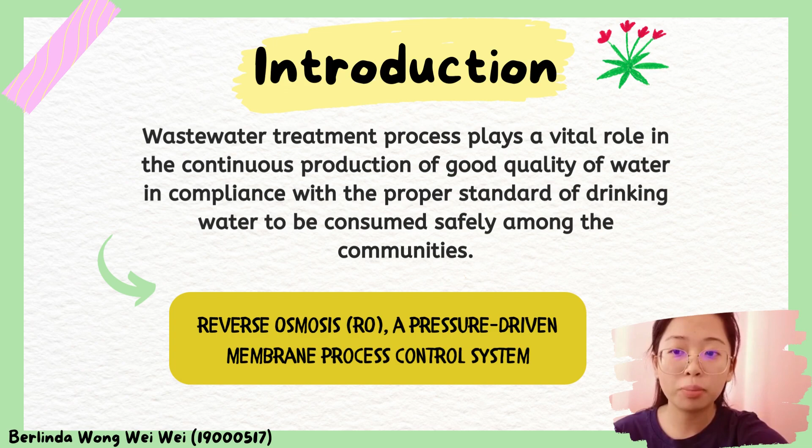One of the physical water treatment methods, reverse osmosis, is a pressure-driven membrane process control system discovered to be widely used for the treatment of municipal or industrial wastewater. Reverse osmosis process is normally used in several applications such as selective separation, purification of water, and concentration process in food and beverage industries. With the pressure applied, the reverse osmosis separates the dissolved solids from the water through a semi-permeable membrane via solution diffusion mechanism.

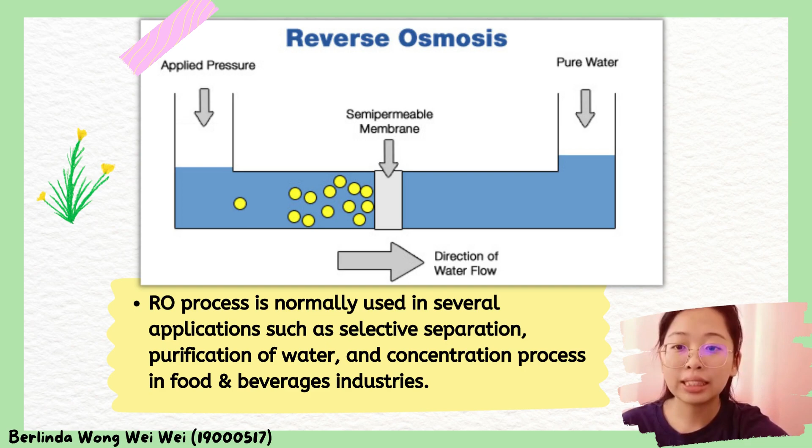As the reverse osmosis membrane is hydrophilic and semi-permeable, the water will be able to diffuse in and out of the polymer structural membrane, and mostly the suspended solid or large molecules are managed to be separated from the water stream.

Despite the potential and advantages of using a membrane-based water treatment process, there are still a lot more limitations or challenges to be considered. This includes the low permeation flux, less selectivity, less membrane durability, and membrane fouling.

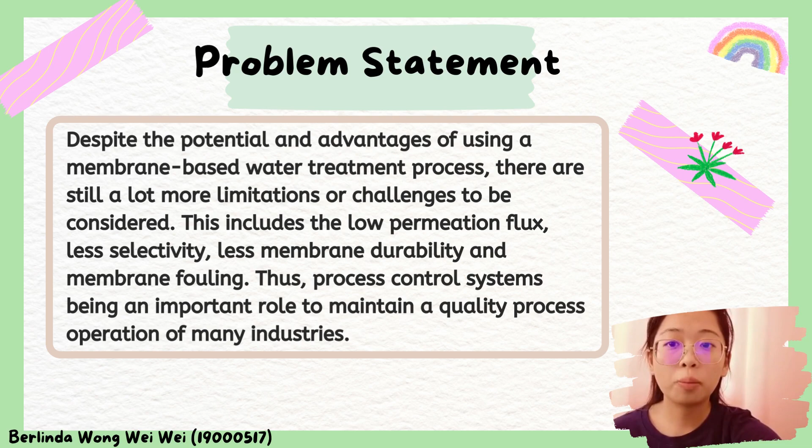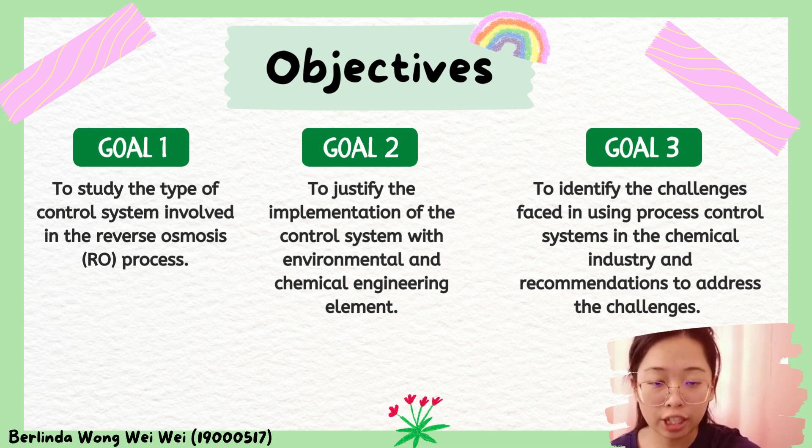Thus, process control system plays an important role to maintain a quality process operation of many industries. With the problem statement, we have the objectives of: first, to study the type of control system involved in the reverse osmosis process; second, to justify the implementation of the control system with environmental and chemical engineering elements; third, to identify the challenges faced in using process control system in the chemical industry and recommendations to address the challenge.

Hi, I'm Navinjeet Kaur, and today I'll be doing the methodology part. Reverse osmosis is one of the most popular separation techniques used mainly for the purification of water. Reverse osmosis, a pressure-driven membrane process, is one of the physical water treatment methods where it is discovered to be widely used for the treatment of municipal or industrial wastewater due to the involvement of low cost.

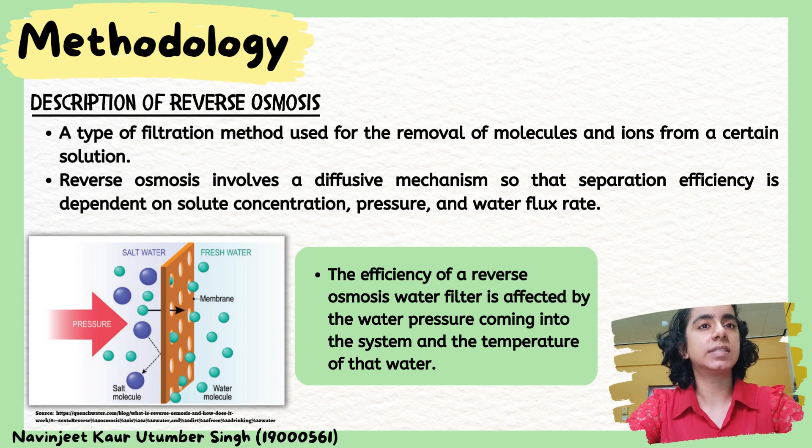It involves a diffusive mechanism so that separation efficiency is dependent on solute concentration, pressure, and water flux rate. The efficiency of a reverse osmosis water filter is affected by the water pressure coming into the system and the temperature of that water. Reverse osmosis involves 4 stages, where the first is sediment filter, followed by pre-carbon block, next reverse osmosis membrane, and lastly post-carbon filter.

The advanced membrane material, process design, and energy recovery have resulted in low-cost production of the semi-permeable membrane to be used in the reverse osmosis process.

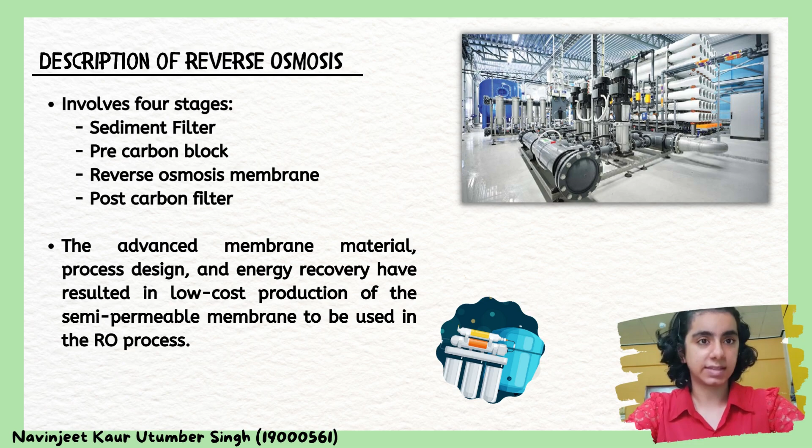The figures in the slide show the process flow diagram of a reverse osmosis control system. The unprocessed water is pushed through a wire strainer in the unit to get rid of any big particulates. After that, the water flows through a cartridge filtering stage with a 5 to 20 micron filter. To remove any residual hydrocarbons that have been dissolved or emulsified, the water is traveled through an organoclay adsorbent vessel at a pace that allows for a 5-minute or longer residence period to accomplish the requisite oil removal.

Microfiltration or ultrafiltration as an intermediate pre-treatment step is considered. The de-oiled water is then sent via a high-pressure positive displacement pump to boost the pressure to 600 to 1200 psi, which is the working pressure for reverse osmosis. In the high-pressure tank, a PID controller is used to maintain pressure at a given point.

The reverse osmosis membrane separates the flow into concentrate and permeate streams. The concentrate is the largest stream, accounting for approximately 85% of the total flow of the operation, and it may be regenerated back to the feed water. The concentrate is regenerated until the salt concentration in the feed water exceeds an upper working limit, at which point the permeate or fresh water departs the process.

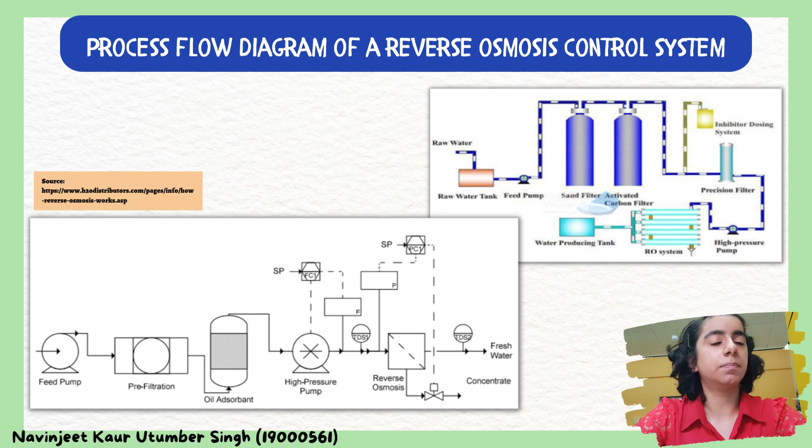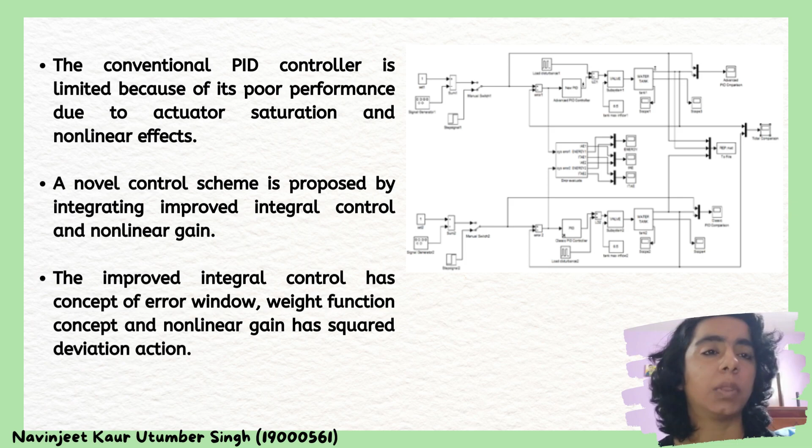The improved integral control has the concept of error window and weight function concept. Also, nonlinear gain has squared deviation action. The performance of the newly proposed PID technique is compared with those of conventional ones via simulation. Present the justification of the proposed process control system.

Now I'm going to present the type of controller. For PID controller, it continuously calculates the error value as a difference between a desired set point and a measurable process variable, and applies a correction based on the proportional, integral, and derivative terms. But for the conventional integral, the controller integral section is between 0 until present. But for the new type of integral controller, the integral section is between a specific past time and present time.

Robust control is a control design method that focuses on the reliability of the control algorithm. Robustness is usually defined as a minimum requirement a control system must satisfy in order to be successful in a practical environment.

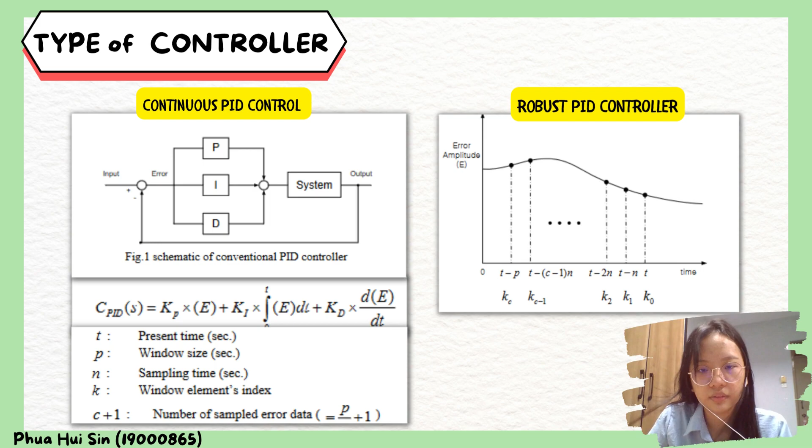Now I'm going to present the justification based on the simulation result. As you can see in the graph, the settling time of the robust PID controller is shorter compared to the conventional PID controller. The settling time is the time required for an output to reach and remain stable in a given error band, following some input stimulus. Therefore, the shorter the settling time, the easier and more efficient it is for the controller to set the outcome to a set point.

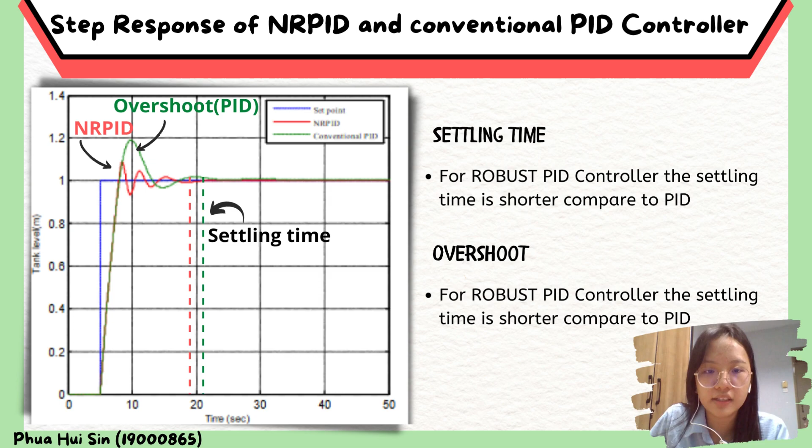For the overshoot, we can see that the robust PID controller has a lower overshoot value compared to the conventional PID. Overshoot value shows how much the system exceeds the targeted value, which is our set point. Therefore, the lower the overshoot, we're able to minimize the response times and make the system more efficient.

Now come to the integral of time multiplied by absolute error of robust PID versus conventional PID controller. According to the graph, initially the robust PID and conventional PID are at the same value, but conventional PID started to increase dramatically after 7 seconds. However, robust PID becomes a straight line. Therefore, we can say that the stabilizing time and peak time for robust PID is shorter than conventional PID controller.

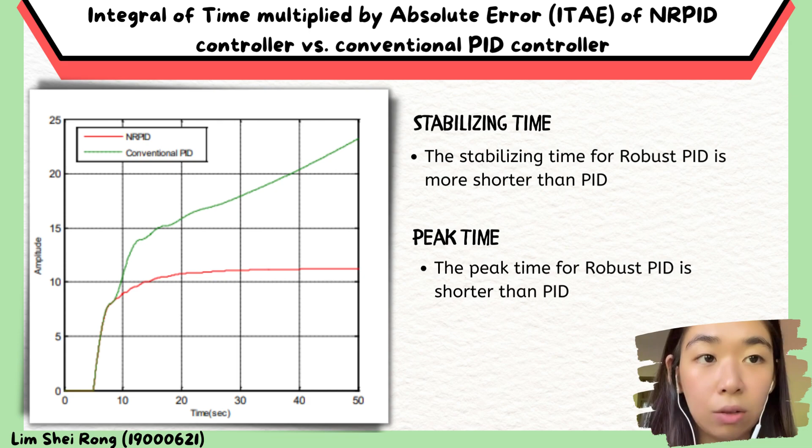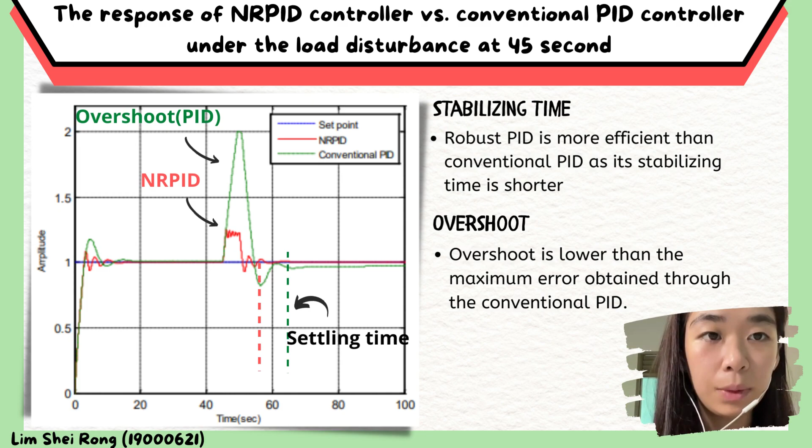Next is the response of robust PID controller versus the conventional PID controller under load disturbance. Based on the graph, we can clearly see that the stabilizing time is shorter for robust PID compared to the conventional PID controller. However, for the overshoot, the maximum error obtained through the conventional PID is higher compared to the robust PID.

Continuing with the integral of time multiplied by absolute error of robust PID versus conventional PID controller under load disturbance at 45 seconds, the graph shows that the stabilizing time for robust PID is shorter than conventional PID controller. The peak time for robust PID is also shorter than conventional PID.

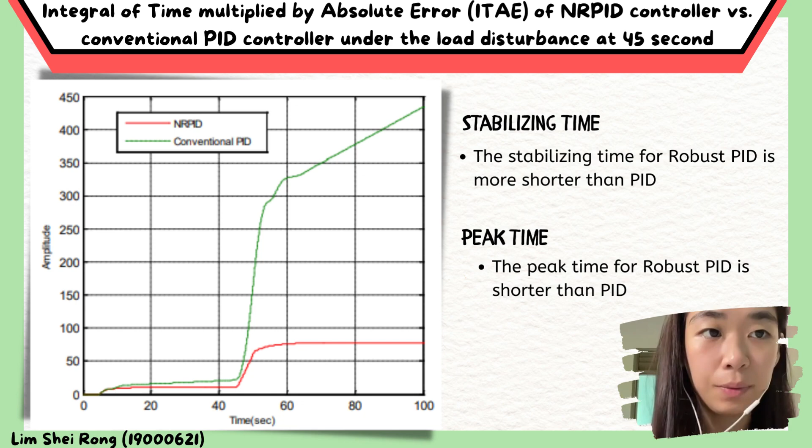As a result, robust PID controller is more suitable compared to conventional PID because the response error of robust PID decreases along with time and the error is not accumulated, which stabilizes the system. The response error of robust PID decreases drastically, which also makes the system more stable. The new concept of robust PID is successfully implemented and proved to be very effective compared to the conventional PID.

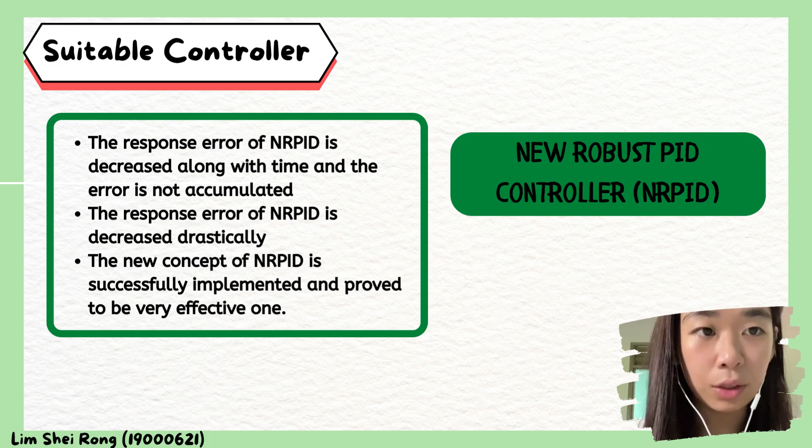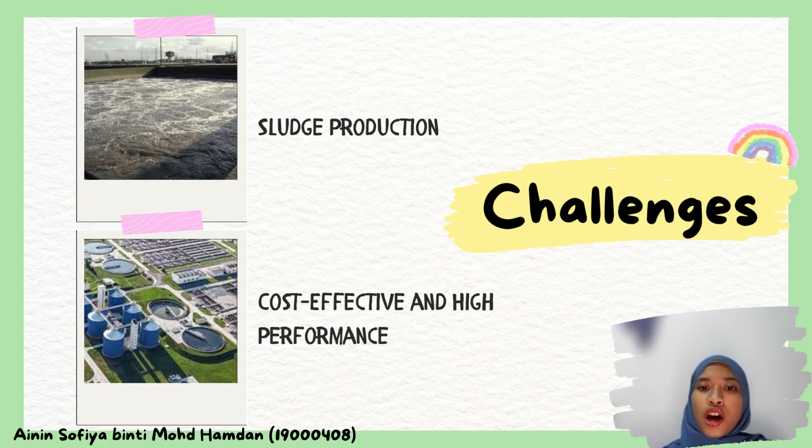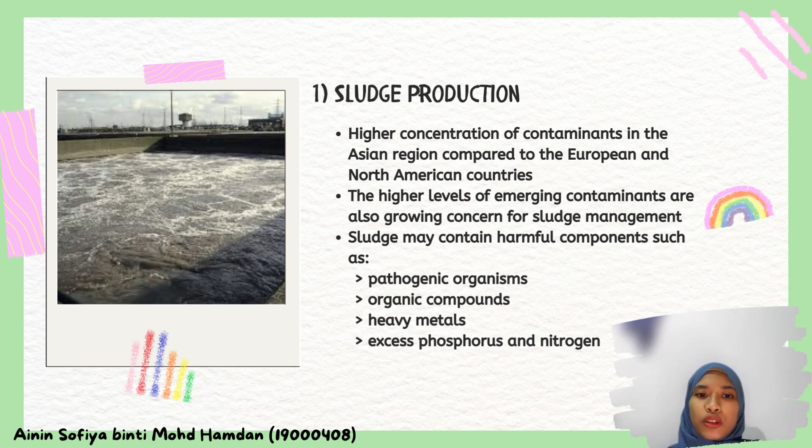The challenges in treating wastewater are varied and depend not only on laws governing effluent control but also on regional characteristics and socio-economic conditions. The major challenge in wastewater treatment plant is sludge production. The Asian region contains higher contaminants in raw wastewater compared to European and North American countries, according to study reports. The higher levels of emerging contaminants are also a growing concern for sludge management, because sludge may contain harmful components such as pathogenic organisms, organic compounds, heavy metals, and excess phosphorus and nitrogen, which may lead to disease and health risks to humans.

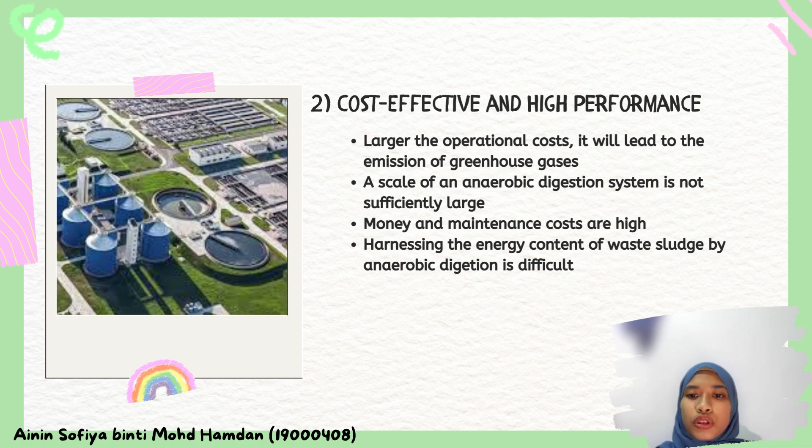The second challenge is to implement a cost-effective and high-performance wastewater treatment system, because larger operational cost will lead to the emission of greenhouse gases. Anaerobic digestion is important in transformation into biogas. However, the scale of anaerobic digestion is not sufficiently large to be able to capitalize on economies of scale. In addition, capital and maintenance costs are also high, and anaerobic digestion is difficult to implement.

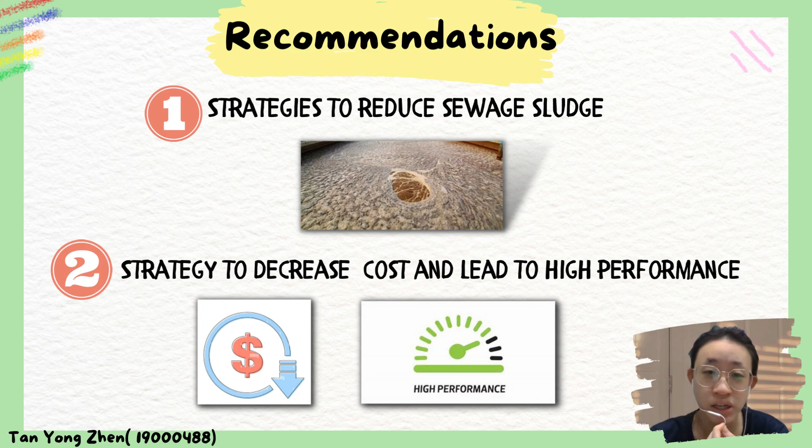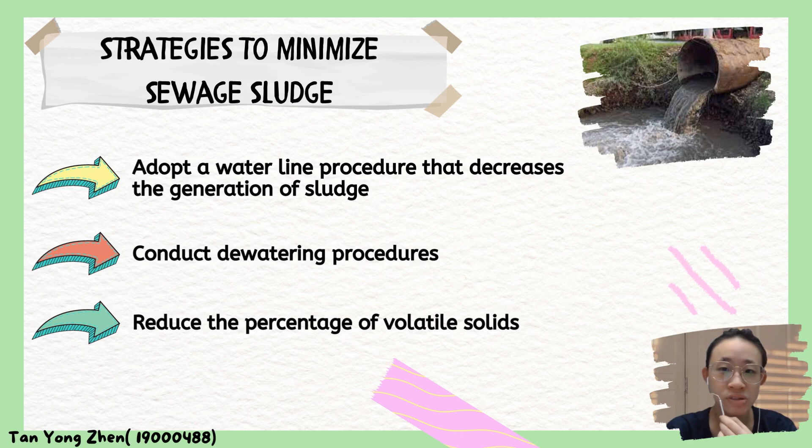Today I'll be talking about recommendations. The recommendations are strategies to reduce sewage sludge and strategies to decrease costs and lead to high performance. The strategies to minimize sewage sludge are adopting a waterline procedure that decreases the generation of sludge, and carrying out dewatering procedures by lowering the water content. Besides that, reducing the percentage of volatile solids is also one of the methods to reduce sewage sludge.

Next, I'll be talking about the strategies to decrease costs and lead to high performance. Reverse osmosis is a membrane-based water treatment process, and membrane fouling will occur. Thus, in order to reduce the effect of membrane fouling on the entire wastewater treatment process, scheduled cleaning of the membrane should be carried out.

Besides that, ultrafiltration pretreatment should be carried out as it is used to pre-treat high-fouling water sources such as wastewater. This is because ultrafiltration pretreatment is continuous without a breakthrough in granular media filtration, and the reverse osmosis membranes are protected without the use of additional chemicals. As a result, the membrane can operate effectively for a longer time with little fouling and high performance. Energy consumption decreases and will cause the operational cost to decrease.

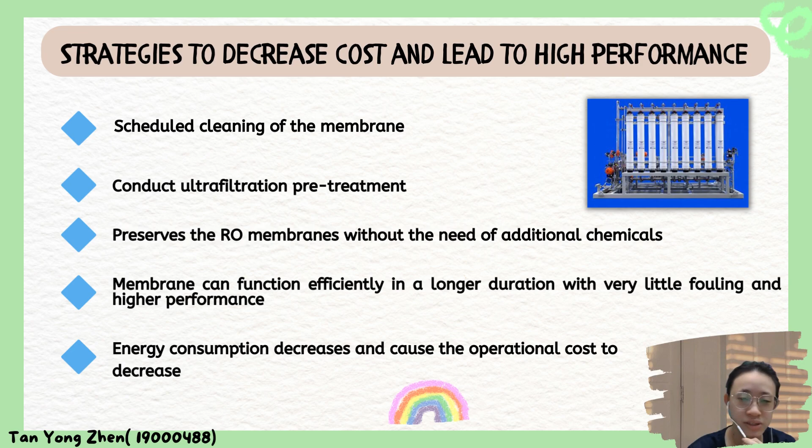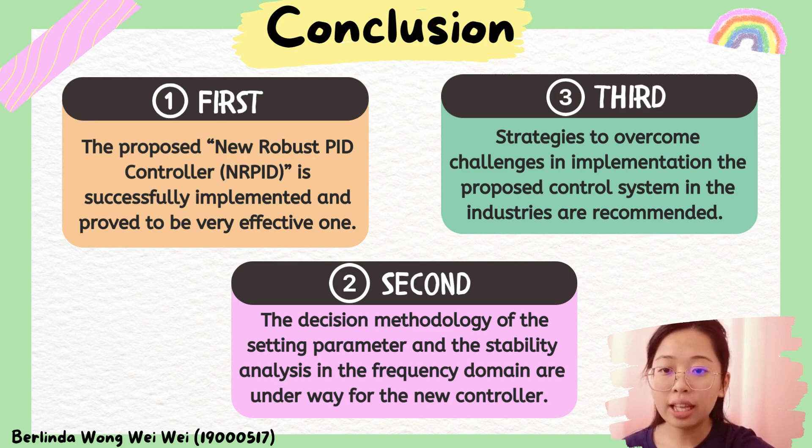In conclusion, our group has successfully discussed zero waste in the wastewater treatment industry. We can conclude that the proposed new robust PID controller is successfully implemented and proved to be very effective. Furthermore, the decision methodology of the setting parameter and the stability analysis in the frequency domain are underway for the new controller. Lastly, strategies to overcome challenges in implementing the proposed control system in the industry, which are sludge production and cost-effective and high performance, are recommended.